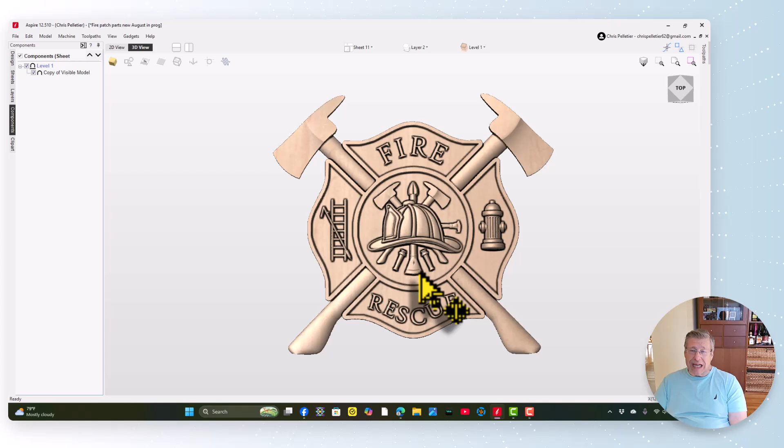I'm going to show you an example. This is a good one because it has a lot of components and it's a pretty popular type of model. You've got the emblem, and this is the full model. You could get this as one model, or I'll show you a different style - here's that full model a little differently.

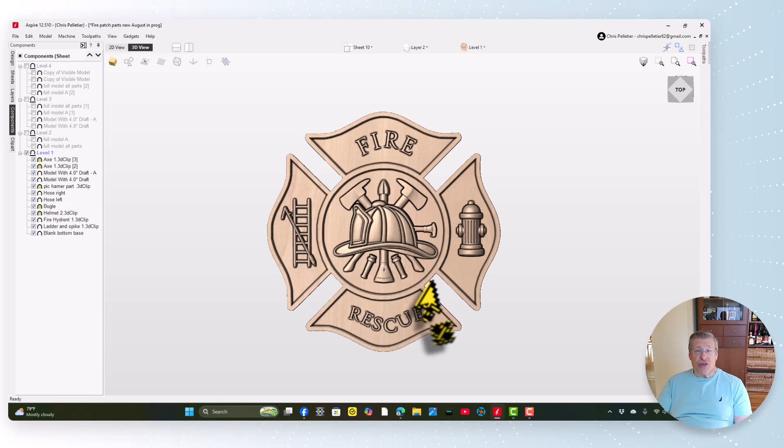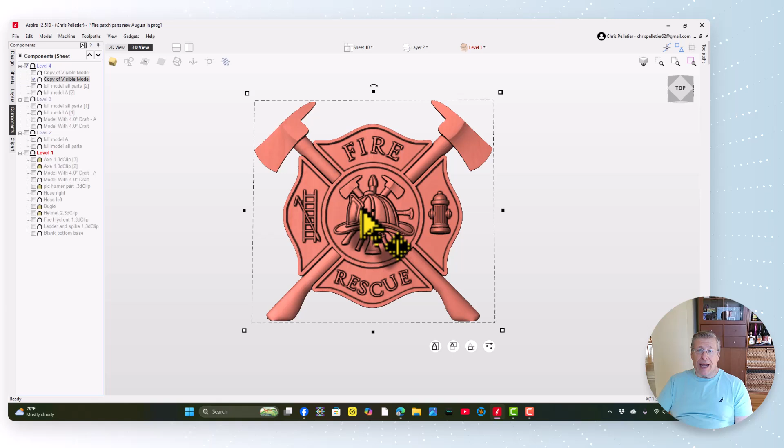If I turn this back on, now you've got the axe - this is the one full model. You can't break this down, it's all built. You have the big axes on the outside, and on the inside you've got a helmet, axes, a bugle, a pick, a fire hydrant, the ladder with the big pick on it, and the fire rescue lettering. So that's one full model.

But in the model club you'll also get, for example, the model without the big axes. And you can separate this too - I'll show you, each piece is a separate piece, and each one will be a component inside the club. So when you join the club, you can get these pieces.

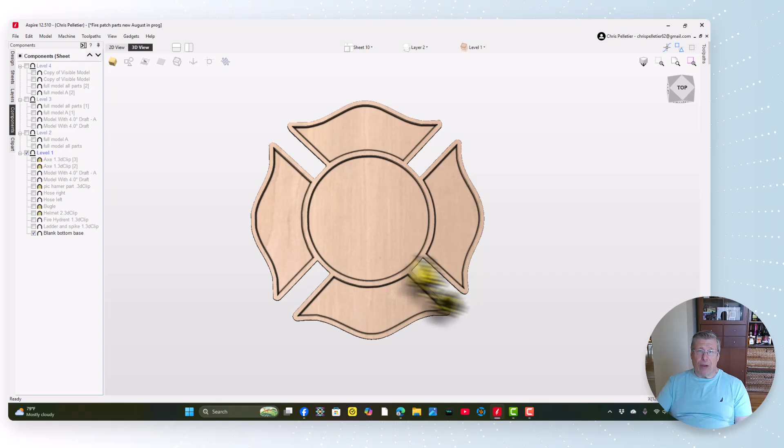First you get a blank bottom. You can do whatever you want with it - if you have Aspire and don't want to make this, or don't know how, you've got this blank canvas to work with. Then I built a ladder, so you can just get the ladder itself, with the pickaxe on it.

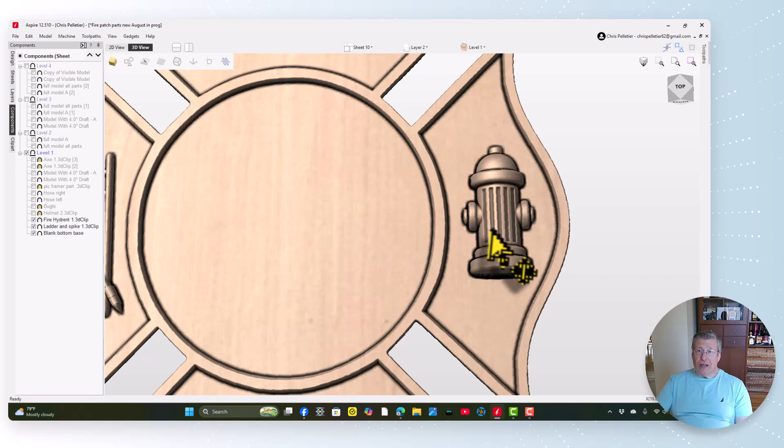So you get the blank, then the ladder, then the fire hydrant as a separate piece, and you'll have that too. Then you have the helmet, also a separate piece, and the bugle as a separate piece. Then you have the two hoses, one on the left and one on the right - these are the hose nozzles. And then you have the pick hammer.

And then you have the words - you can change those words, make your own, you don't need to use them. And then you get the two axes, so you've got one and two.

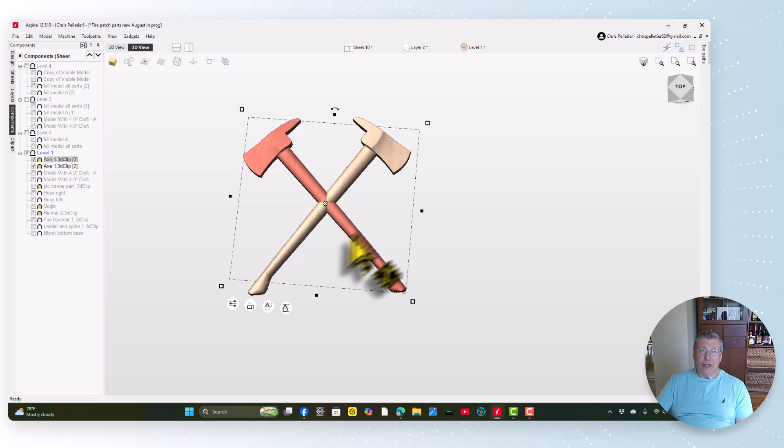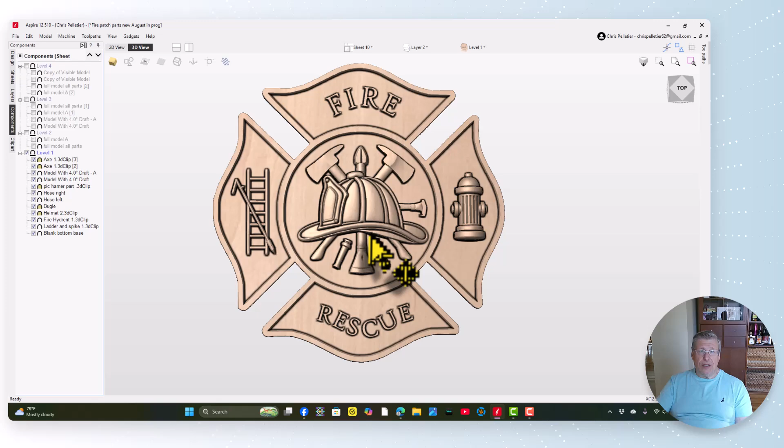So now, if you were to build this, you would bring in all the components, and there you go - you have a solid model. Then, of course, you can build it off into whatever you want. Let's say you just want the helmet - you can do lots of things with just the helmet itself.

So now you've got this, and you can do whatever you want - add words, other pictures, use a V carving into here if you want. So you can have a little bit of 3D and a little bit of 2D with the V carves. That's part of it.

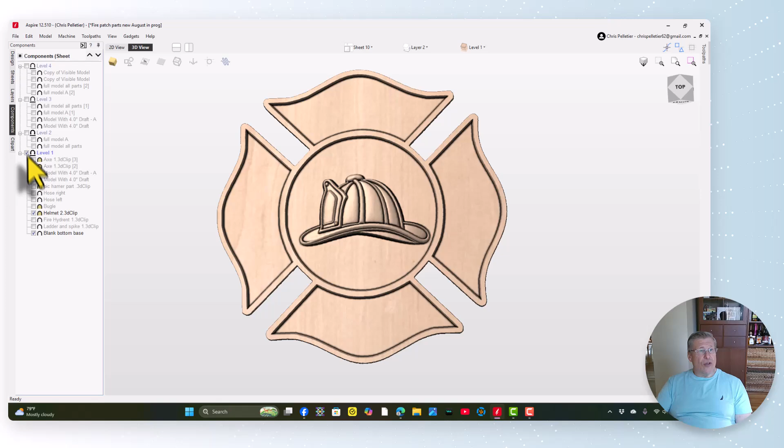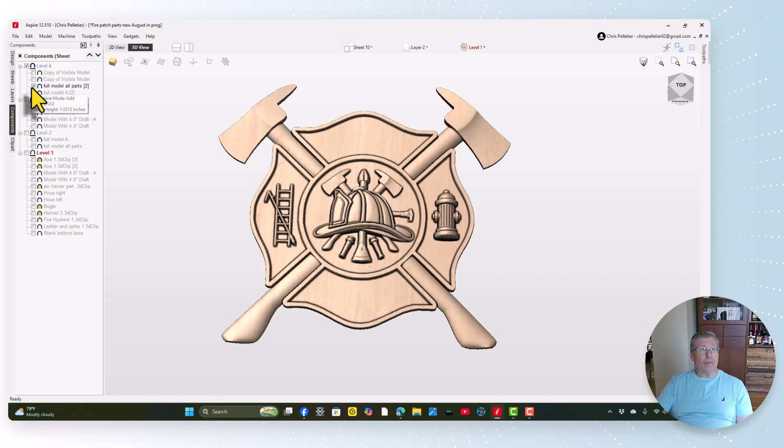In the club you'll also have a full model like this, and a full model of this which doesn't have the big axes on the outside. Then you'll also get them without words - sometimes you want the words, sometimes you don't. This one has the words 'fire rescue,' whereas this one wouldn't have the fire rescue on there, and this one wouldn't have it either. You might want to customize it to your station and your fire department.

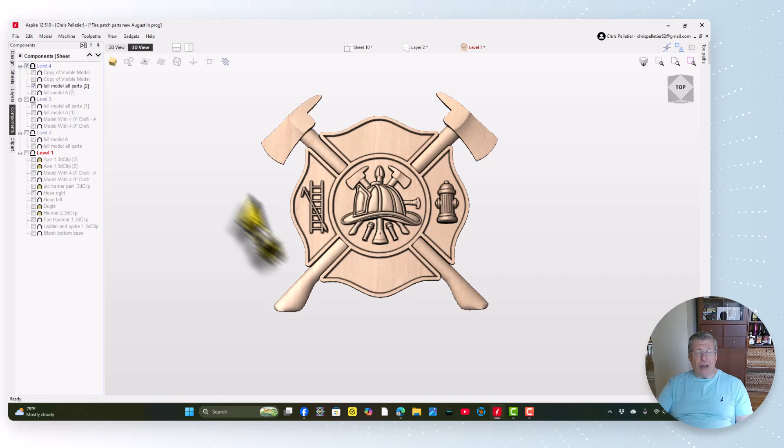So that's what you're going to see on these different models.